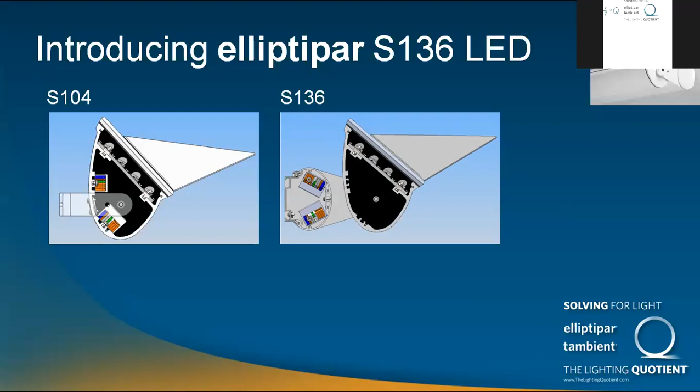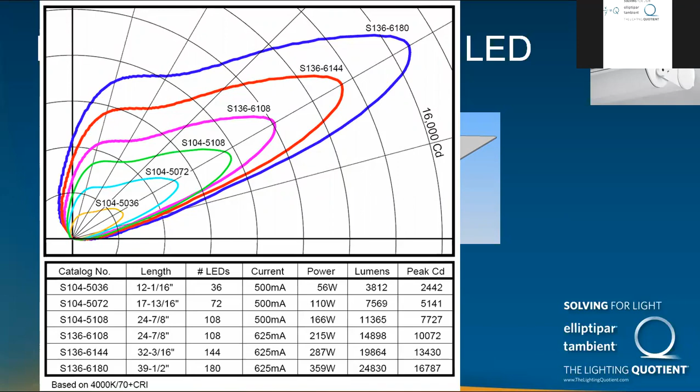This is an overlay of all the S104 and S136 offerings, and you can see the wide variety of lumen packages available. This is actually just representing the 4000K 70 CRI, but you can see the length is in the first column. We have 12, 17, 24 inch, and then the 136 starts at 24 inches again, but now we're driving it at 625 milliamp, and then we have a 32 and a 39-inch length at 625.

This is just a quick look at the catalog page. It is available online now, and I'll take you through and highlight some of the specification options. The first is the light package, basically the drive current and number of LEDs. So the lamp itself consists of the drive current and the number of LEDs. So 6108 operates at 625 milliamp, and there's 108 LEDs, all the way to 6180, which is our 39-inch fixture, which has 180 LEDs driven at 625 milliamp. All of the catalog pages have a link where it says click here.

Here. Oh, okay, I jumped ahead. So the mounting options are S, X, and 1. S is surface mounted for wall mounting. The X mount is used with the cantilever accessory, which is actually in a pendant orientation for uplighting, and it's really for the 24-inch units. And then the cluster assembly, the VPR, is the single stem pendant.

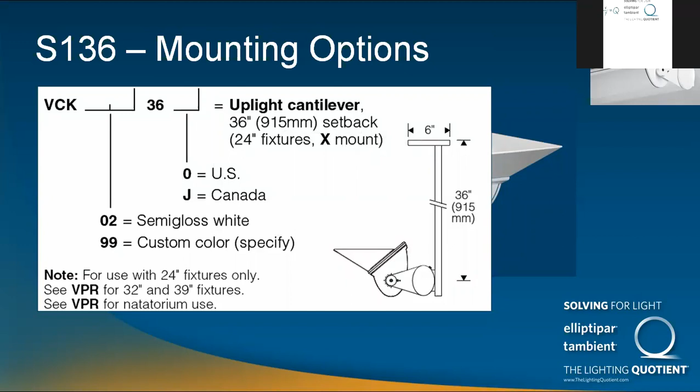So this is a view of the S mount. Here's a quick view of the cantilever being used as a pendant, and again, it's only for the 24-inch long fixtures. The length of that is 36 inches, but we have done custom lengths a little bit longer. It just depends on the situation, but the best choice is typically the VPR pendant, which can be used with any of the 3-size fixtures.

It is available with a natatorium option in both a straight pendant as well as a swivel pendant for sloped ceilings. We did submit both one-way and a two-way, so we should have the two-way back-to-back version of this in the next few weeks.

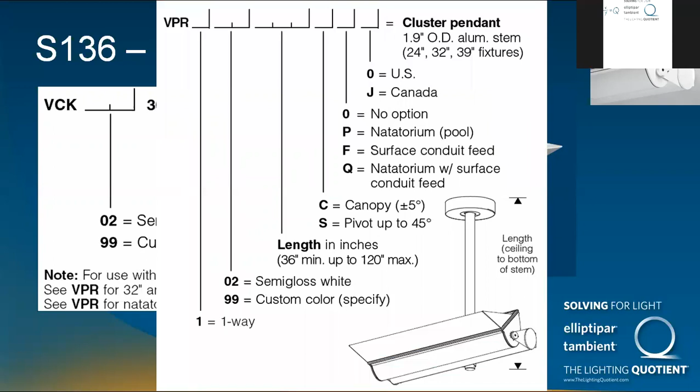The voltage option has been simplified. It used to be 1 for 120, 2 for 277, but now since pretty much all the drivers we use are dual voltage or universal voltage, we've come up with the 8 voltage code, which is non-dimming universal voltage 120, 277, M voltage for dimming. We'll also be adding the 7 voltage codes in the next few weeks.

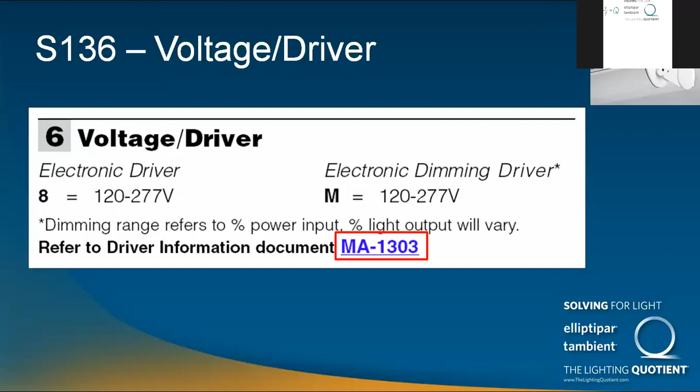This is where we have a link to all the driver information. The document opens up as a PDF, and it includes information about all of the drivers that we use, as well as remote distance and minimum starting temperature. The links on the PDF itself will take you to the specification page for each of the drivers. Now you can see this is at Rev N, so this is constantly being changed and updated as new drivers become available.

Our options: the fixture comes standard with a cutoff visor, wall mounted and it's uplighting, and you will need a visor most of the time. Zach will show a few examples where you might be able to get away without it. And then the VP option is for the indoor pool or natatorium use. The main difference for the natatorium is that we seal all the cord exits going into the head assembly so that the LEDs are not exposed to any moisture or condensation.

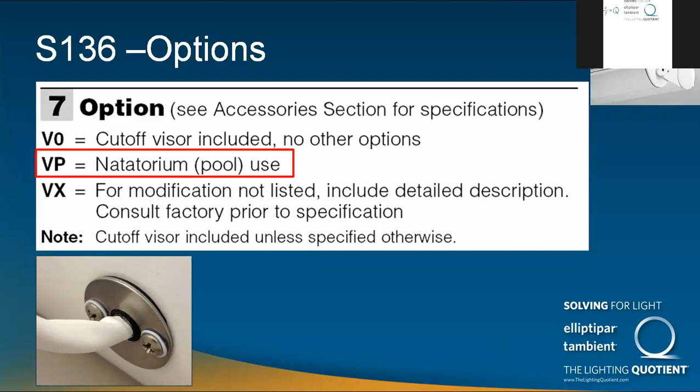Color temperature and CRI options, as I said before, 2700 through 4000 Kelvin, with options in 2700 and 3000 for 90 CRI and 4000 K for 70 CRI. The dimming options for the 136 include dimming, which is just 0-10 analog dimming. There's 00, which is non-dimming, but there's ZX for 0 to 10 dimming. That dims to about 5%.

We also have 2 eldoLED dimming options. One is for 0 to 10, but that actually dims basically to off, and it's a premium dimming driver. And also the eldoLED DALI version of that same driver, which allows you to have addressable drivers.

As far as the construction, as you would expect, it's all extruded aluminum for the heat sink housing and enclosure. We use all stainless steel hardware. We use stamped aluminum sidearms, die-cast aluminum end plates. All the gaskets are silicone. The finish is electrostatically applied baked polyester powder. It's an enamel finish, very rugged and easy to clean. Standard on the catalog page is just semi-gloss white, but of course we can offer it in any of the RAL colors, as well as if you have a sample chip that you want to send in, we can computer match that.

All of the light engines are serviceable for replacement or future upgrades, so they are accessible. This is an exploded view; typically these are done for the factory just to show how the assembly goes together.

Now lumen maintenance, this is where we're talking about the LEDs themselves and how they perform in the fixture. The first report I'm bringing up is a typical LM80 report, which is furnished by the manufacturer of the LED. In this case, it would be Lumileds. And what's nice is that they have 10,000 hours of data. And that's important when we get into the TM21 report.

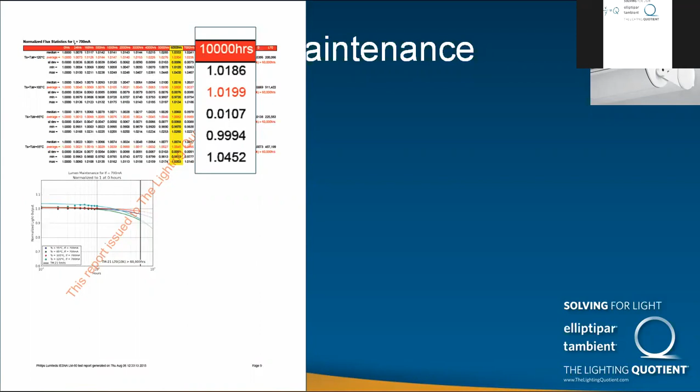So the LM80 is from the LED manufacturer, and then that gets used with the in situ test where we send our fixture to a third party. In this case, it was UL.

They will allow the fixture to come up to full temperature. They'll take measurements on the driver as well as the hottest LED, and that gets correlated together with the LM80 data and the in situ temperature. We put it into the Energy Star TM21 spreadsheet, and it will calculate either L70, L80, whatever you would like.

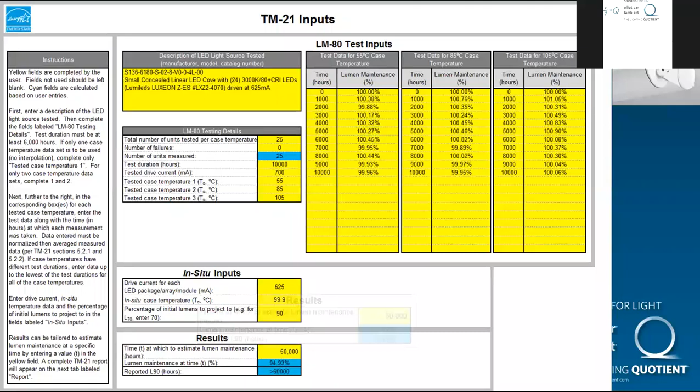In this case, we asked it to calculate L90, which is 90% of lumen maintenance, or 10% reduction in light, and that's going to happen well past 60,000 hours. The reason it's 60,000 is that per TM21, you're not allowed to report more than 6 times your actual test data. So that 10,000 hours of real test data is what allows us to claim greater than 60,000.

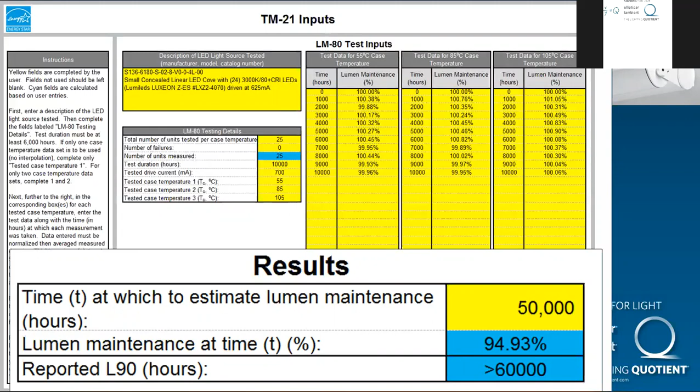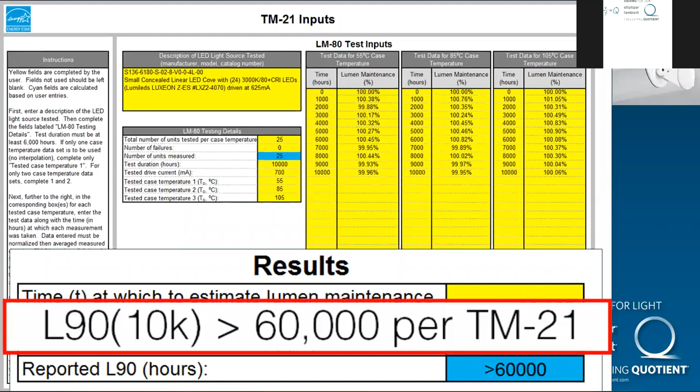Now above that, 50,000 hours, and that's just showing what the lumen maintenance is at that time. That comes from the lighting facts label. They typically ask for 25,000 or 50,000, so you'll see that value on the lighting facts label. And on our catalog pages, this is where you'll see the L90 10K. The 10K stands for how much data has been actually measured, and greater than 60,000 hours per TM21.

Now, if we switch over to the website, if you click on products and click on the quick find, it will bring up a dialog box. If you type in S, it will bring up all of the Elliptipar LED products. If you type in S1, it'll bring all the surface mounted up. S2 would be recessed, S3 would be cove light. In this case, I've typed in S136, and it brings me right to the product.

And this is where I can open up the data sheet, which we looked at before, and it opens up in a PDF format. I can also access the product fact sheets. These are the sell sheet, which is a two-sided sell sheet with a color photograph of the product on the front. On the back, there's a cross-section as well as performance curves and features and benefits.

We also have scaled performance tables, which are helpful when you want to find out exactly how many lumens are being delivered, not only for the 3 different size fixtures, but all the different color temperatures and CRI, which you can see there is quite a difference.

Just looking at the first, the 24-inch fixture with 2700 Kelvin 90 plus CRI is 9955, and it goes all the way up to 14,898 when it's 4000K 70 CRI. So there is a large difference, and it's just inherent in all the LEDs. The cooler the color temperature, the lower the CRI, you're just going to have more light output.

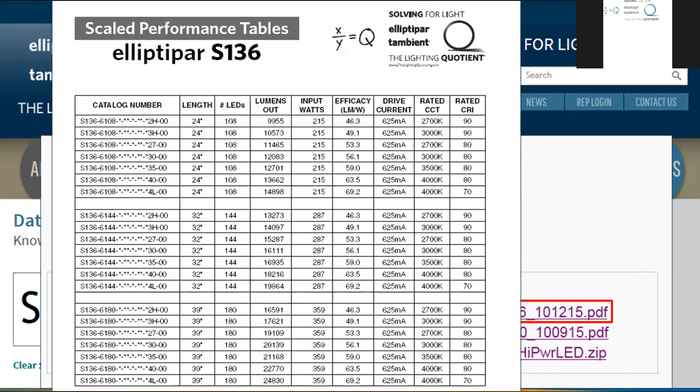The lighting facts label, you'll have access to that. And this is where that 94.93 came in, the lumen maintenance projection at 50,000 hours. We also have, and this is fairly unique, TM30 reports. TM30 is the new color metric that the IES has put forward for evaluation. We've included all the TM30 reports for our LEDs online.

It's a 7-page report. I'm just opening one of them, that says 2700 Kelvin 90 CRI. The first page is a summary report, which at the top gives you an R sub F value and an R sub G value. R sub F is the fidelity, which is most similar to what we all know as CRI, but it's evaluated over 99 samples rather than CRI, which is only evaluated over 8.

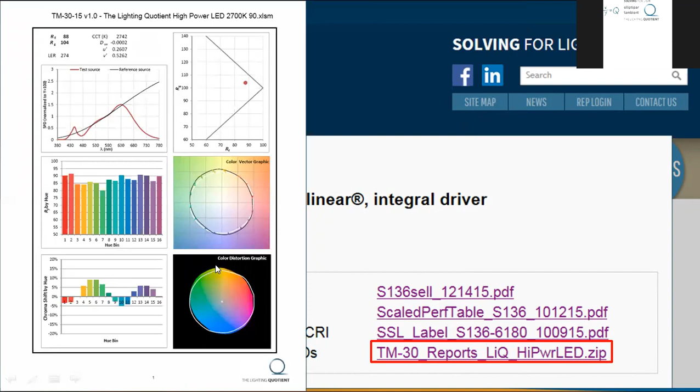The R sub G is the gamut or the saturation, and that's really best shown in these circular diagrams, where when it goes outside of the circle, that's showing you which colors the LED tends to saturate. The next few pages are a little bit more in depth. This is the R sub F value for TM30, and also the CIE R sub A or CRI value. And you can see there will be a difference between the two, because one is evaluated on 8 colors and the other on 99.

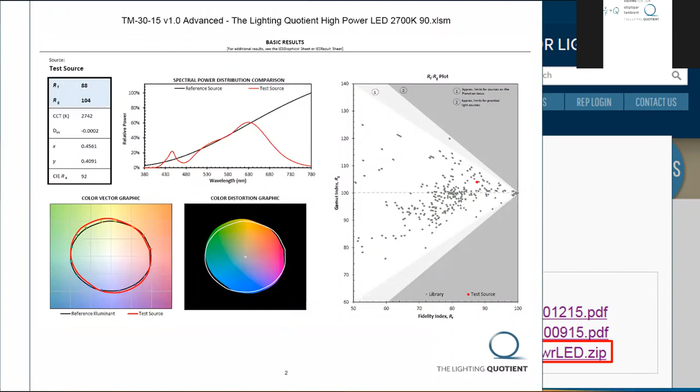This shows another value which may or may not take off and be used, called R sub skin, where they'll evaluate the colors that render skin tones.

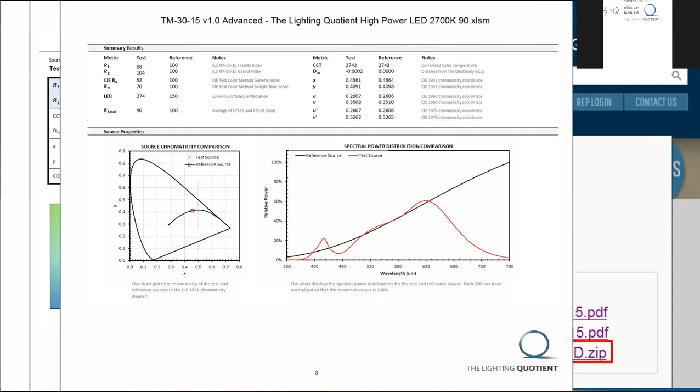So the TM30 has not been adopted by the IES yet, or by the CIE, I should say. The IES put it out there sort of to kick the tires, get people to look at it and evaluate it and see if they like it.

This page is showing the 99 color samples, and each block is actually two samples. The left half is how it would show that color under a reference source, and then the right half would be under this particular source. And the left just shows kind of the score for all 99 colors.

So it's something that may or may not get adopted by the CIE, but it is good to take a look at that and start using that. I'm going to talk to you about the photometric files.

As far as application, certainly if you're working with someone, they would like our group to look at something in terms of a calculation, we're more than happy to do that. But naturally, there are a lot of designers who want to access IES files, or in some cases actually go back and look at the original reports.

In that particular case, we do have posted the report, in this case generated by UL for the style 136. If somebody does want to check out that PDF, it is available, and that gives them access to all the original information from the test, including some of the color data, candle power curves, lumen distributions, and so forth.

Again, while we're happy to do calculations, many people will be using a program like AGI or other software, and if they want access to the IES files, we've tried to simplify their lives from the standpoint of not having to take only one photometric report and then factor it umpteen times based on the CRI and CCT selection.

So while Paul showed you that scaled performance table, which is a great way to at a glance evaluate how choosing one color temperature or CRI ranking will influence lumen output, what we've done is take each of the 3 fixture lengths and place them under each particular color.

So as an example, if you went into this table and made the top selection, you would get a zip file that contains 3 IES files, all assuming 2700 Kelvin, 80 plus CRI, and representing each of the 3 fixture lengths: 108 LEDs, 144 LEDs, and 180 LEDs.

If you realize clients asked for 90 CRI, you could exit and then select the zip file for 27K 90 CRI. Just trying to make it a little bit easier so that users of this information aren't having to always on the fly factor each of these reports.

For anyone who might be using Revit, there are some BIM files available for the 136. It's contained in one zip file, which would then get you this type of 3D embodiment of the fixture. If any of you are big fans of Revit or work with clients that use it often, there are different packages. You'll have MEP consultants using one package versus architectural customers. And what we've done is use what they call their face-based tech.

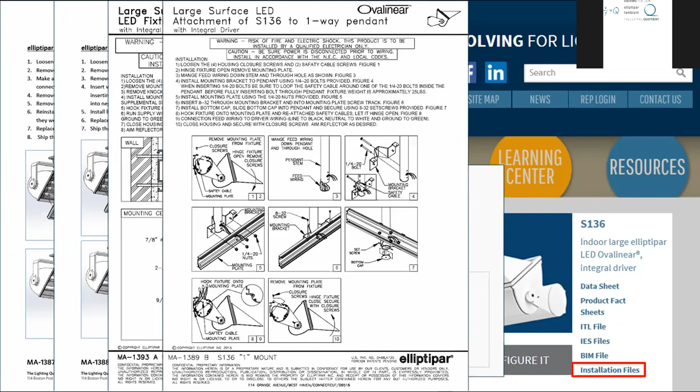And assuming we have a couple minutes at the end, we actually have a cutaway sample of style Paul can show that. And finally, the pendants, which in projects like a natatorium frequently come up as a way of getting the fixture closer to the edge of the water area, and we have installation sheets of those types of fixtures.

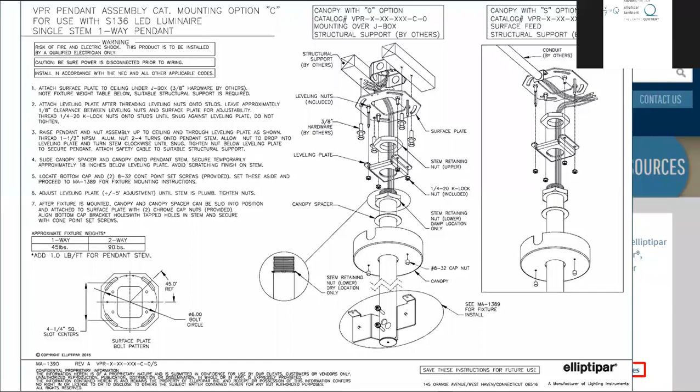Just to dive into the VPR in a little more detail, Paul showed the catalog sheet which mentioned straight versus so-called swivel or hang straight, as well as what we'll call standard versus natatorium, which involves a few hardware changes. I also wanted to point out you can use either overhead power feed or direct conduit by selecting the correct letter code. The drawing you're seeing here is relative to the straight pendant stem, but what we'll call the swivel comes up frequently.

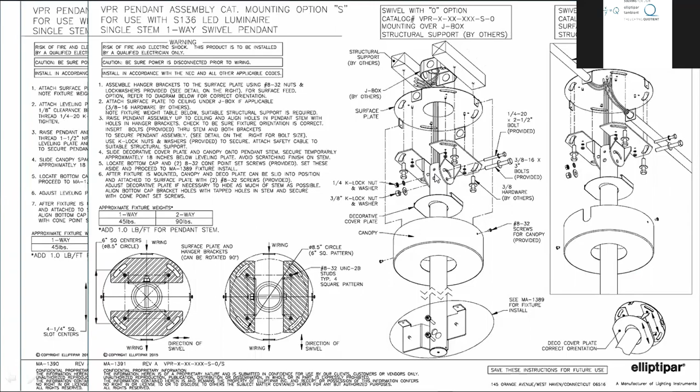However, keep in mind it's not swivel in the sense that it just hangs loose. What this accommodates is, say, a pitched ceiling deck in a natatorium where you need to compensate for perhaps a 5 or 10 or 15 degree slope. The actual detail allows the final plumb positioning to be locked into place, so it stays plumb. But these types of applications and situations come up frequently.

In terms of applications and lumen output, when we announced the S104 a year ago, the 12-inch size, the 17-inch size, and the 24-inch size gave us 3 ranges of lumen output that were roughly akin to the traditional 300 watt to 500 watt halogens, or on the metal halide side, the 12-inch was quite like the 70 watt ceramic metal halide in either the warm or cool colors. The 17-inch was much like the 150 watt ceramic metal halide, again, in either the warm or cool selections.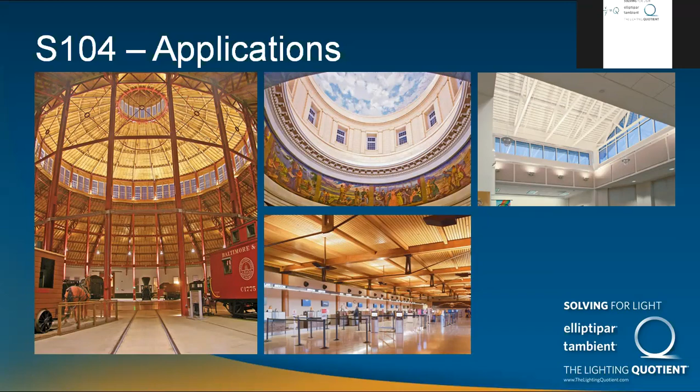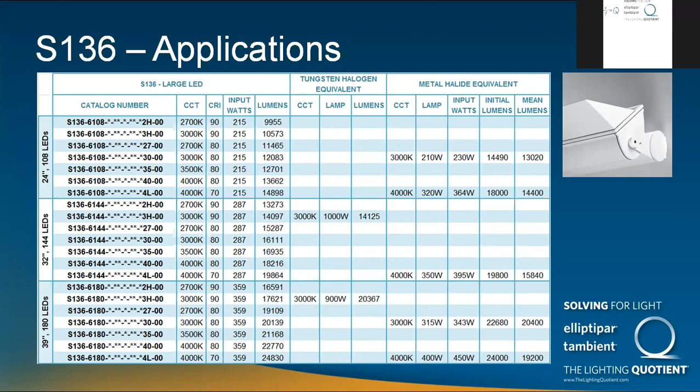On the halide side, you can see those 3 lengths. The shorter length is comparable to either a warm-colored 210-watt Elite or a 320-watt Pulse Start. The middle length is very comparable to the 350-watt Pulse Start, and in the longer length, we're comparable to a 315-watt Philips Elite in the 3K or a 400-watt Pulse Start in the 4,000 Kelvin.

And on the pools, there are some things like NCAA competitive centers with very, very high foot candle requirements. But even a pool that's looking for 50 foot candles and has a moderate deck height, something in the low 20s, 20 to 24 feet, that's now also within our reach, looking at the 39-inch units in some pendant-mounted arrangement. So once again, a recap of the overall launches that you've seen, and most recently on the subject of high lumen, the S104.